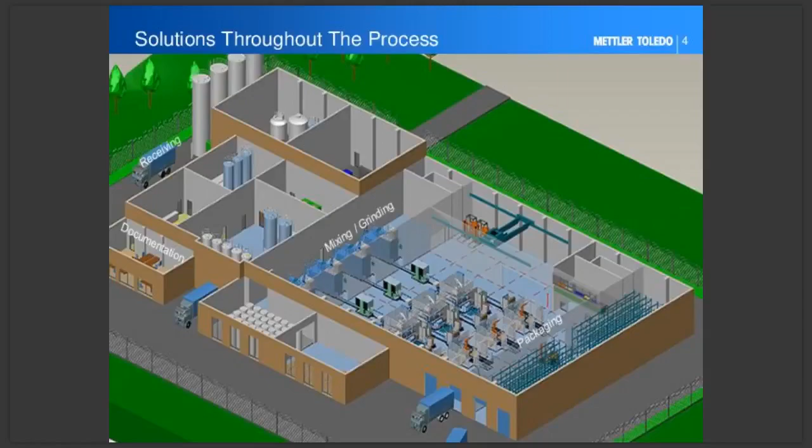Product handling is another location where we can see a lot of waste occur. Throughout the process of that facility, as we're transitioning from one department to another, from one conveyor system to another, there is the potential for spillage when transitioning from conveyor belt to conveyor belt.

So it's important that when you look at the overall design of the system itself, you're also taking those things into consideration for reducing waste and ensuring that product isn't able to spill off there. Transition points can be tailored to suit specific applications to ensure that product isn't lost.

Multi-lane rejection systems for bulk flow applications, where rather than rejecting the entire width of the belt, we only have to reject the small portion of the belt that has the contaminated product within it.

Having system capabilities such as fail-safe systems is important. Obviously, if we had an incident where something was supposed to be rejected off the system via an air pressure device, whether it was a pusher or an air blast, doesn't really matter. If for some reason there was a problem with the air pressure and we were unaware of it, that non-conforming product could make it through the system and down the line, ending up as a customer complaint, or heaven forbid, a product recall. Then all of the product manufactured within that particular time frame becomes waste as we have to recall and dispose of it.

So it's not just about the equipment and how it's designed and where we apply it within the facility. It's also the processes that are implemented and the setup of the equipment utilized. Those should all factor in when we look for efficiencies and reducing waste.

For example, meeting the requirements for weights and measures, the inline check weighing capability ensures that 100% of the products have been inspected as they go across that weigh cell, as opposed to a random sampling. You can imagine, whether it's a metal detector where we're challenging it every so often with physical contamination, the test is only as successful as the last successful test.

So with any products, if we go up and perform a verification activity on a system and discover there's an issue, all of the products since the last successful verification really need to be addressed. When we have 100% check weighing, checking 100% of the products, we can look back and identify a smaller amount of product that needs to be dealt with when these issues occur, as opposed to random sampling maybe twice a day.

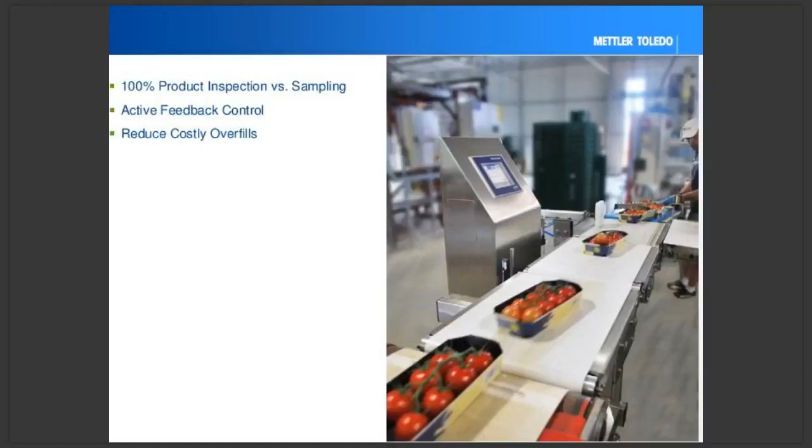With an inline checkweigher, because we're sampling 100% of the product weight, you could also have feedback controls to things like filler stations to automatically adjust and correct the issue at the filling station. Again, reducing the need for human interaction with the system to understand there's a problem and go correct it. You can have an inline system where that feedback is occurring automatically, reducing the time to send somebody over there, improving the efficiencies of the overall line operation, and ensuring it's being done correctly.

Here's an example of a case study we looked at, where a slight improvement in weight measurement capabilities had a major impact on annual savings as well as packages produced. In this facility, they were basically overfilling the package by 1 gram in order to limit customer complaints for an underfilled product. It may not sound like much, but when you look at the potential savings, in this case the nominal value was 460 grams.

The material cost was a very nominal 1 cent a gram, with a throughput of 200 packs per minute. When we reduced that 1 gram overfill, it equated to over $31,000 of annual savings. And that's not what really impressed me the most. What really impressed me the most was the additional 60,000 products they could have produced, as well as the material saved.

So when you look at what a gram's worth, in this case it can be significant. Having an inline system with automatic fill station feedback, where 100% of the products are being looked at, means we don't necessarily have to go with the overfill mindset to ensure we're protecting the brand, the consumer, and consumer satisfaction.

So when we look at other technologies like metal detection and X-ray systems, it may sound like a good idea. These devices are designed and implemented to detect the smallest contamination possible. So you might see setting up a metal detector or X-ray system to be more sensitive, detecting smaller contamination, as a positive step. However, if the increased sensitivity results in an increase of falsely rejected product, that's going to equate to a lot of product waste. Frequent false rejects also create a loss of confidence in the system.

If you have a line operator standing next to a metal detector that's going off all the time, that becomes the normal day-in, day-out operation. That's what they're used to - that silly detector's always going off. Every time we investigate to try to find the contamination in the rejected product, we can't find anything, so we know it's a false reject.

So I've seen it where, if the reject product is in an unsecure reject bin where employees have access to it, they might remove that product and place it back on the line simply because they don't believe it's actually contaminated. That's not only going to increase the risk of contamination reaching the end customer, but it's also going to potentially increase the amount of time and effort put into that system, and affect the overall efficiencies of the production line.

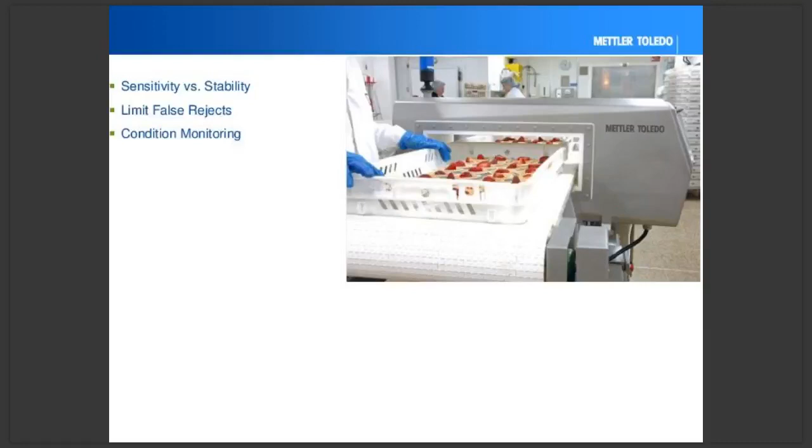So here's another little bit of a case study that we have. In this case, we're looking at testing of the metal detector.

Currently, the facility is testing every 2 hours. I would say in my 22 plus years with Mettler Toledo that's probably about industry average. People are testing it every hour to every 2 hours.

In this case, the test takes 3 minutes to perform, and they're performing it 12 times a day on 24 different lines. So you can see that there's about 864 minutes worth of lost production that is occurring.

When we look at the bag production rate versus that lost production time, it's 86,000 bags. Do that over the course of 350 working days, let's say a year, and that's 30 million bags of lost production, and that's simply just from performing the normal required verification type activity on a typical metal detector.

Whereas if I look at when we test the detector, and in all actuality, I prefer to use the term challenge the detector. When I challenge the detector, the only reason I'm really doing it is to ensure that it's operating correctly and functioning properly.

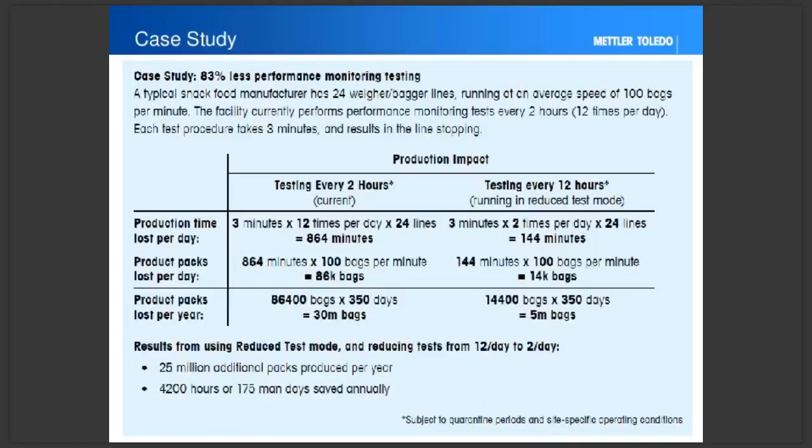So we talked a little bit about in the beginning about OEE, overall equipment effectiveness or efficiencies, either one. I've heard it called many different things. The reality is a lot of the requirements for things like food safety and various regulatory requirements are going to add some cost. They are going to certainly add cost to the overall program, whether it's within time or resources or money itself.

But really, in today's world, there's no room for complacency in the highly competitive food arena that we have today. Really, no matter how safe the production line is, you have to stay focused on continuous improvement.

Reality is because that's what your competitors are doing. Every piece of equipment, every operation on a production line really does have the potential to reduce those overall efficiencies. And the more complex the line is, the more opportunities there are for equipment failure, the more opportunities for human error, the more difficult it is to make quick and trouble-free changeovers from one product to another.

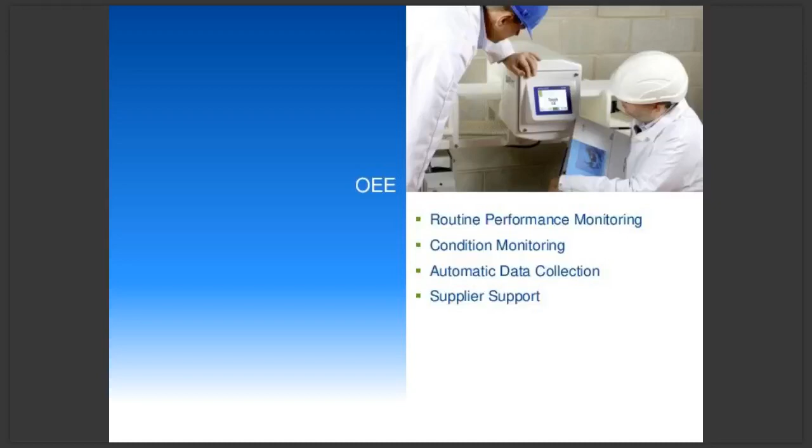So again, that accurate production data is really at the heart of OEE. If the performance data is faulty or incomplete, you'll be misinformed, looking for improvements in the wrong places, and quite frankly, you could actually be making things worse.

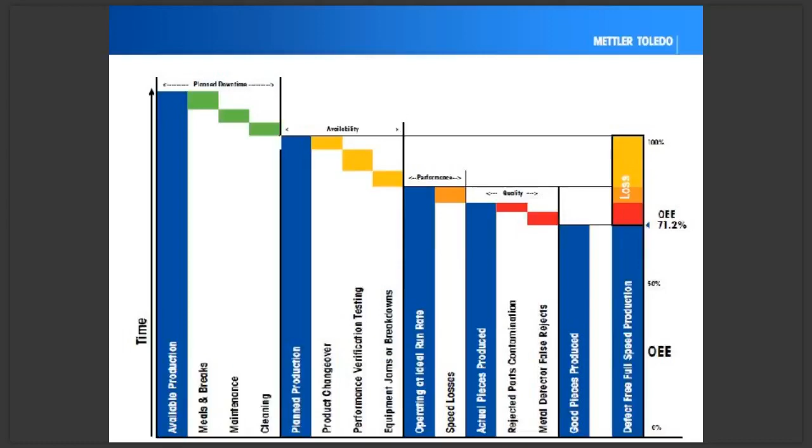So here we can see some of those areas that we've talked a little bit about. If we can reduce some of those factors, the impact it has on OEE can mean significant gains.

Utilizing the right product inspection solutions in the right locations, having them designed and built to increase your confidence in their ability to function as intended, can have significant improvements in OEE. When utilized as part of a company-wide approach to product safety, inline product inspection solutions are really an essential item in the mission to protect consumers and brand reputation.

I don't know of many facilities today that don't have some sort of foreign body detection device, whether it's screening, magnets, metal detection, or x-ray systems.

We understand the risks today, and we understand that there are technologies out there that can help reduce those risks. Using those is certainly a good step in ensuring that not only are the products safe, but they're of good quality as well.

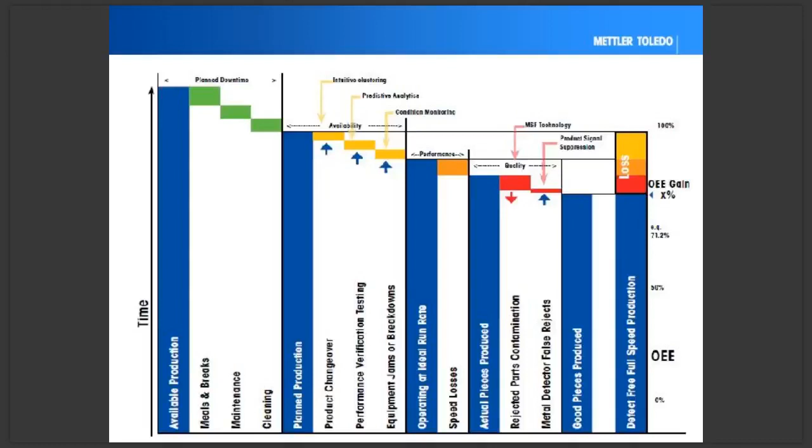Yes, there have been some questions - I don't know if you've seen them coming in. Antonio asks: will testing of the metal detectors every 4 to 8 or even 12 hours be acceptable by the certification body SQF?

Can you turn your mic on? Sorry, I think you might have switched it off. Can you hear me now? Yes, can do - sorry, I clicked the mute button. I hope the mower wasn't too much of a problem for everybody. He kept going back and forth, so I tried to cut him out when I could - I do apologize for that. No, it's fine.

So in regards to testing the metal detector - most standards, whether it's FSMA, SQF, or BRC, don't really specify a time frame for verification activities such as testing the metal detector. What they're going to do is ensure that whatever you have written within your food safety program, you're actually working toward. So if you have it in there that you're testing every 2 hours, you better have proof that you've been testing it every 2 hours.

So it's really up to the facility. Most facilities make that determination based on what happens if things go wrong. If I test it at 8 o'clock in the morning and don't test it again until 8 o'clock at night, and it doesn't work at 8 o'clock at night, all the production I ran during that day needs to be quarantined, maybe reworked - it's suspect for contamination because we don't know when it failed.